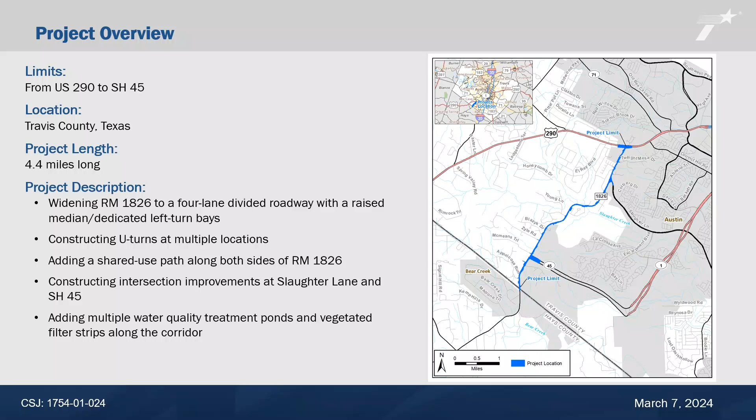The proposed project is under consideration due to the ongoing increase in population in the project area and surrounding region, resulting in elevated traffic volumes and congestion. In turn, mobility and safety along the segment of RM 1826 have decreased. The existing roadway also does not include ways to accommodate different modes of travel, including bicyclists and pedestrians. The purpose of this project is to reduce congestion, improve mobility, safety, and enhance different modes of travel along RM 1826 to meet future traffic demand.

Between 2017 and 2022, traffic volumes along RM 1826 increased by 6.71% to 8.91% per year. This figure depicts 3 sets of traffic volumes at several points along RM 1826: the traffic volume as measured in 2022, and the forecasted traffic volumes in 2025 and 2045. Traffic volume along RM 1826 is forecasted to increase by more than 50% by 2045.

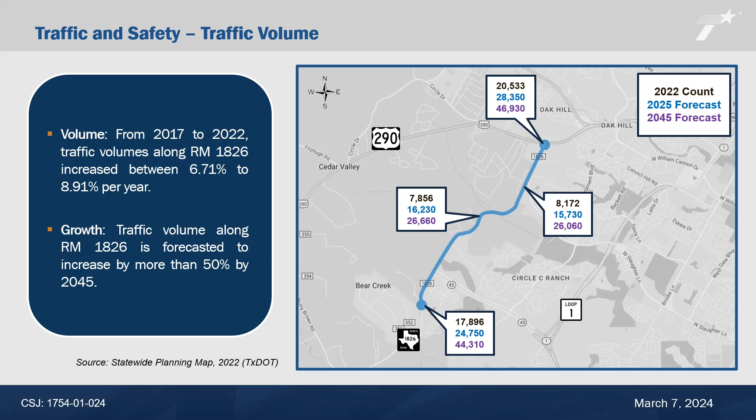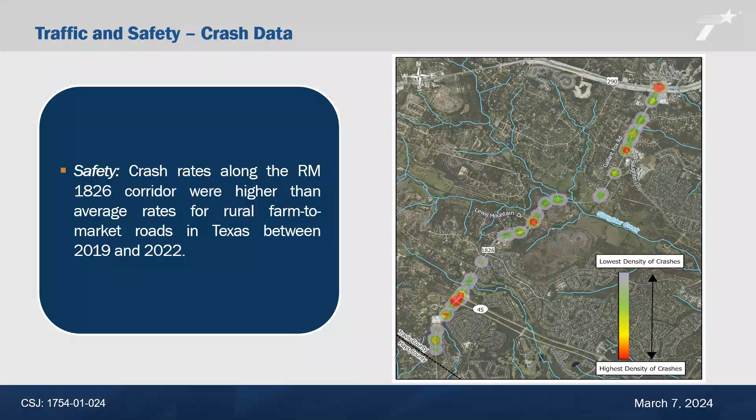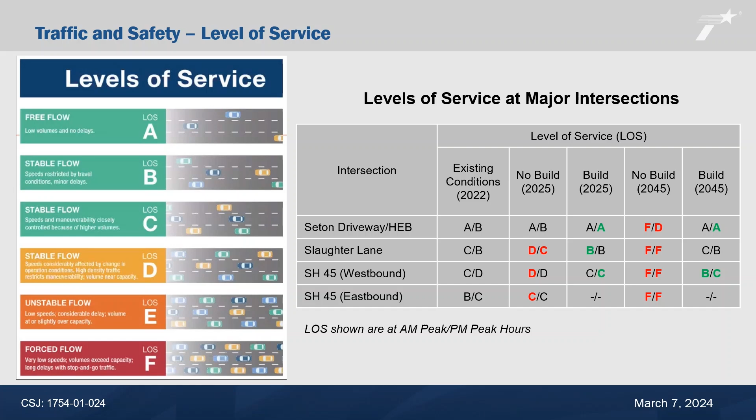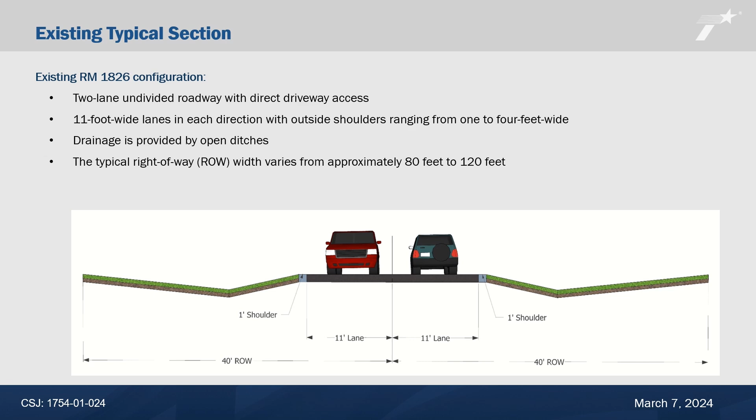The existing RM 1826 is a 2-lane undivided roadway with direct driveway access. Both lanes are 11 feet wide in each direction and have outside shoulders varying between 1 to 4 feet wide. Drainage is provided in open ditches. The typical right-of-way width varies from approximately 80 feet to 120 feet.

The proposed project improvements include the following: 4 12-foot wide travel lanes, 2 in each direction, dedicated left turn bays and/or a raised median dividing the roadway, U-turns at multiple locations, a 10-foot wide shared use path for bicycle and pedestrian accommodations along both sides of RM 1826, a closed drainage system consisting of water quality ponds and vegetative filter strips, improvements to the RM 1826 intersection at Slaughter Lane, and an innovative intersection at SH 45.

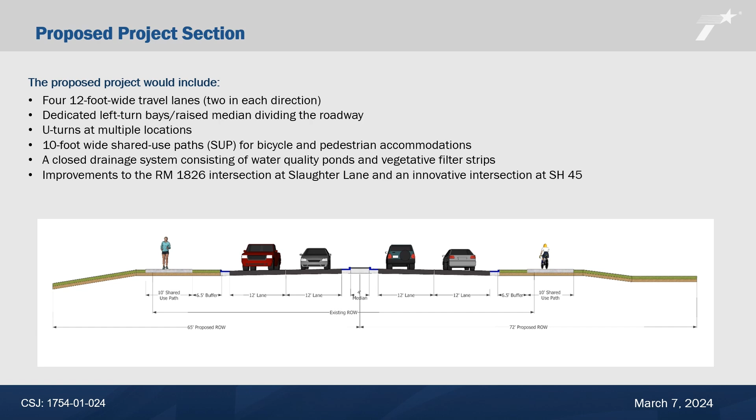The proposed right-of-way width would vary between 132 to 260 feet. You can view detailed typical sections of the proposed project by clicking on the exhibit boards at the TxDOT website at www.txdot.gov, keyword search RM 1826 from US 290 to SH 45.

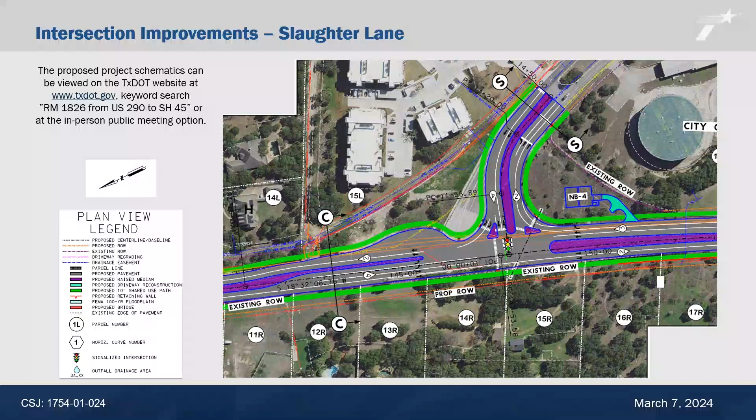The proposed schematics are available at the project website for public review and can be found on the TxDOT website at www.txdot.gov and search RM 1826 from US 290 to SH 45.

This slide is the intersection of RM 1826 and Slaughter Lane. As depicted in the conceptual schematic drawings, this intersection was chosen to utilize an innovative continuous green T, or CGT, concept to improve efficiency of traffic operations.

A CGT intersection is a 3-leg intersection in which one direction of traffic does not have to stop unless needed for pedestrian crossings. These intersections reduce delay at high-volume locations by removing the need to stop both directions of main lane traffic to accommodate left turns.

A CGT concept was chosen to benefit left turn conflicts with high-volume through movements. Also, this type of innovative intersection was selected because local drivers are familiar with this configuration and has been proven to be functional over time.

Other innovative intersection improvement concepts were considered for this intersection. However, due to higher amounts of proposed right-of-way needed, local experience and driver expectations, and reduced delay congestion with improved traffic flow, the CGT intersection concept was chosen.

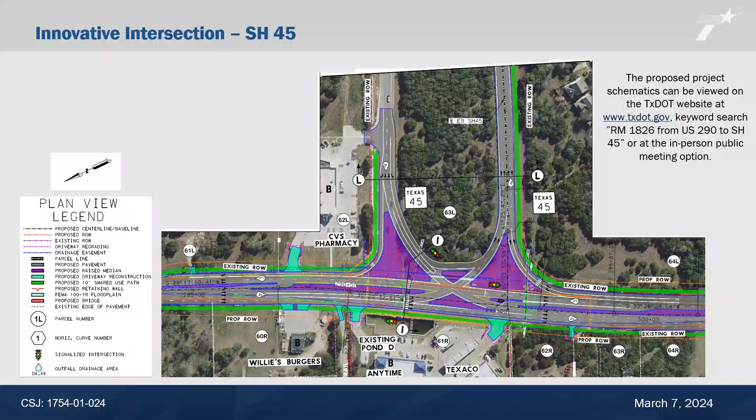The proposed project schematics are available at the project website for public review and can be found on the TxDOT website at www.txdot.gov and search RM 1826 from US 290 to SH 45.

The purpose of the loons for RM 1826 are to allow for emergency responders, tractor-trailers, and/or large vehicles to have enough room to safely U-turn and to improve traffic congestion.

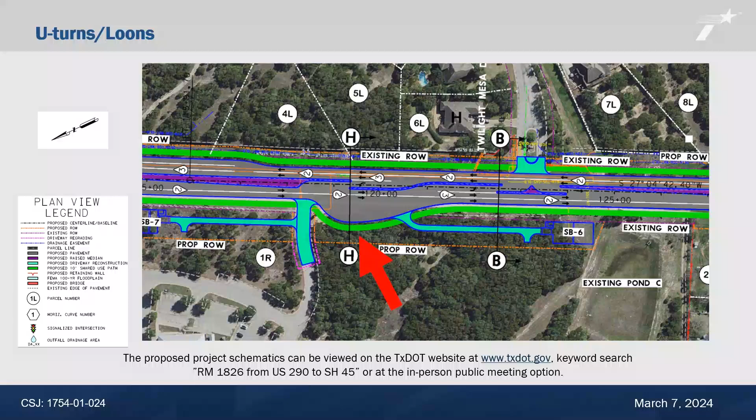The locations of all the proposed loons can be viewed from the proposed project schematics that are available at the project website for public review and can be found on the TxDOT website at www.txdot.gov and search RM 1826 from US 290 to SH 45.

Some of the resources and issues that will be assessed include traffic noise, social and community impacts, hazardous material sites, biological resources such as threatened and endangered species, water resources, and historic and archaeological resources. In addition, potential impacts to the Gray Rock Golf Course would be addressed through the Section 4(f) process, which protects publicly owned recreation areas.

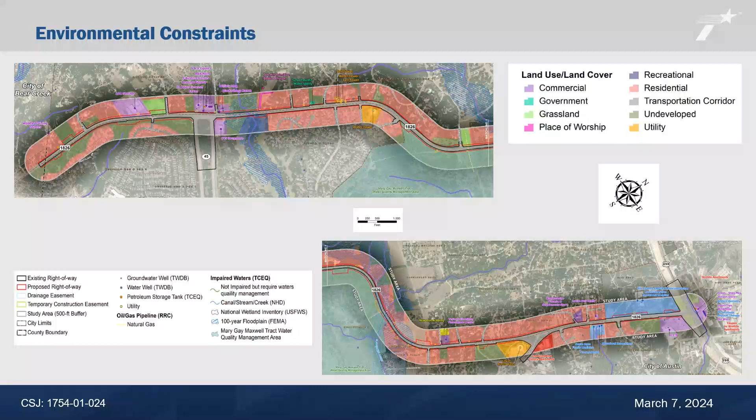The proposed project would require approximately 34 acres of additional right-of-way, approximately 0.3 acre of permanent drainage easements, and approximately 1.6 acres of temporary construction easements. No residential displacements are proposed.

If environmental clearance has been obtained and the project has been fully authorized, TxDOT would begin the acquisition process. All right-of-way acquisition would be done in accordance with the Uniform Relocation Assistance and Real Property Acquisition Policies Act of 1970, commonly referred to as the Uniform Act.